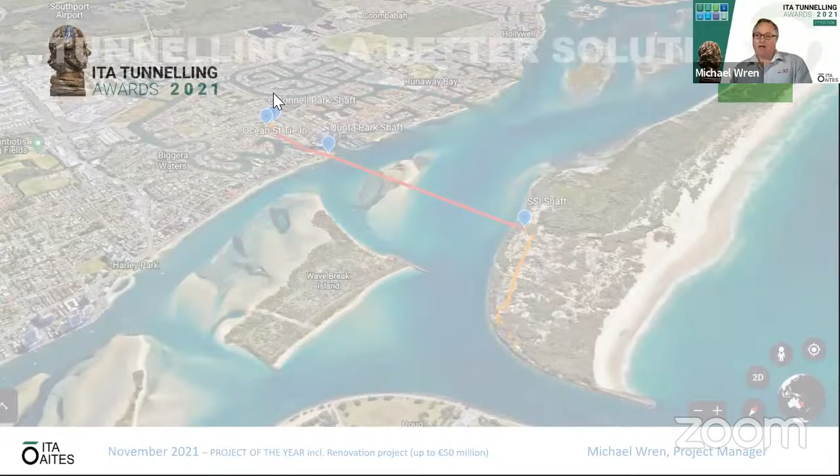Part of this project was to install a pipeline from the Gold Coast across to South Stradbroke Island. That pipe was 1.4 kilometres long, and it needed to transfer treated water at a rate of over 6,000 litres per second.

The initial idea was to have a dredge crossing — to dredge and lay a pair of HDPE pipes. But there were significant social and environmental issues with that. There were layers of coffee rock within the dredge profile.

The dredge plume would have impacted over 3 kilometres of this waterway. There were seasonal nesting grounds for curlews on Carter's Bank, an area of seagrass, and all of South Stradbroke Island was a state marine park. So all of that would have been damaged by the dredging.

There was also a large community of sailors, fishermen, recreational boat users, and tourism attractions here on the Gold Coast, and they would have been impacted as well if we had gone with a dredge solution. So together with our client, the City of Gold Coast, John Holland developed a better solution for this pipe crossing, which was tunnelling under the Broadwater.

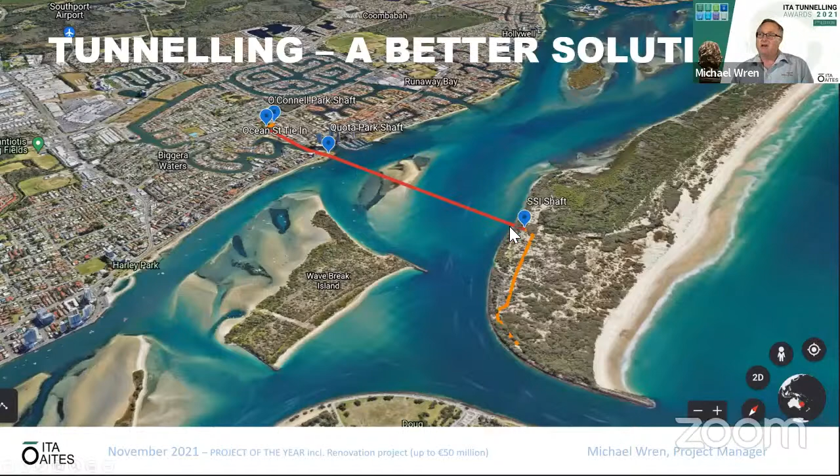We had some exceptionally good consultants, contractors and suppliers on the project. Our key designers and consultants include WSP, Golder, Bonacci, McMillan Jacobs, Independent Civil Solutions and BAMSA. Our key subcontractors were Bothar and Keller, and our key suppliers were Humes and RPC Iplex.

One of the things we did differently on this project was developing a partnering approach. Initially, we ran some partnering workshops before construction started, and that allowed everyone on the team to understand the key drivers for our client, City of Gold Coast, and for the project itself.

During that workshop, we developed a partnering charter that set the expected behaviours. It didn't replace the contract or subcontract agreements, but it did set a basis for how we communicated and how we made decisions throughout the project.

Even when we faced the worst of our challenges, all of the delivery partners were able to work together to successfully complete the works.

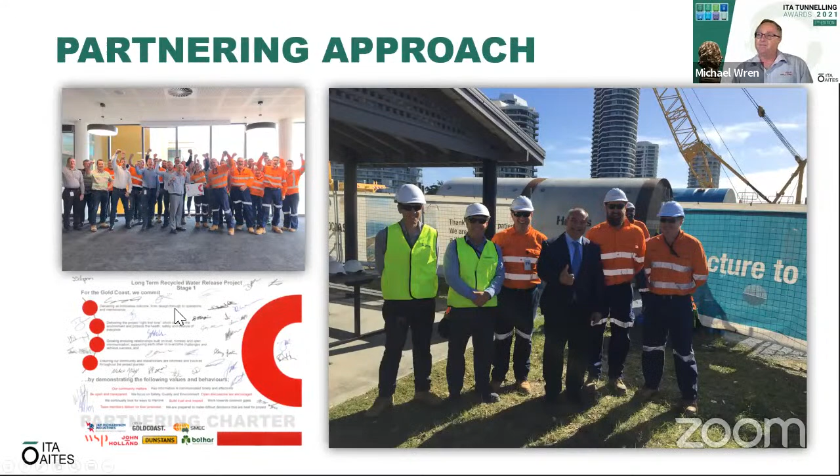This was an extremely complex project. We had 2 shafts over 20 metres deep in saturated sands. The drive was 1.4 kilometres through varying ground conditions, and because it was in the Broadwater, there was no economical place to put an intermediate shaft, so we had to do the full 1.4 kilometres in one shot.

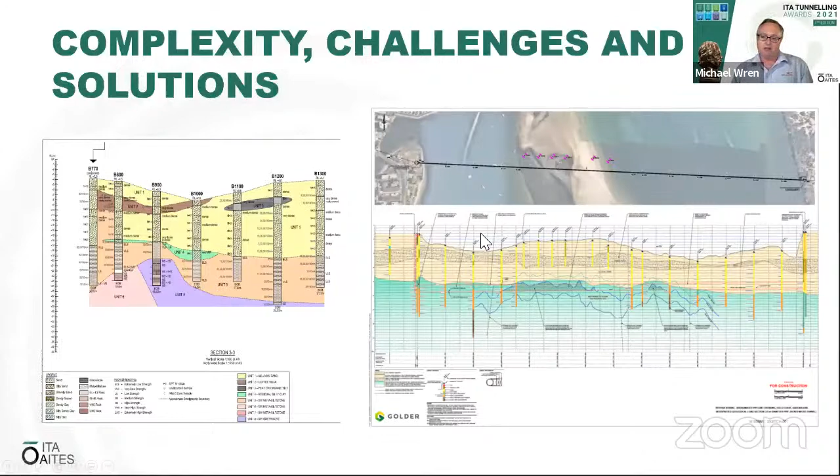We certainly had our challenges, but with our partnering approach and really good subbies and consultants, we overcame all of those challenges. One key challenge was saturated sands — we had 2 shafts to build in saturated sands. Where we did the secant piles for the launch shaft, we had issues with significant water ingress into the shaft, and we resolved that through jet grouting around the shaft and increasing our water treatment.

Over on South Stradbroke Island, we had a different construction technique. We sank a caisson there, but again that hard layer of coffee rock above the soft layers of sand made things quite difficult, and we had some movement and damage to the caisson. Golders put together a really great plan to remediate that — polyurethane injection, more jet grouting, an internal steel sleeve, and some annulus grouting.

The mixed face tunnelling conditions themselves did have quite a bit of an impact, so when we were doing all of our planning, we really focused in on that last section of sand, saturated sand.

Bothar had some really good equipment and really good plans for managing the sand, but the mixed face ground conditions forced the TBM out of allowable survey tolerance. We overcame this because we had a product pipe inside the carrier pipe, and we were able to adjust that to get the tolerances we needed.

The most significant challenge we faced was some significant cracking and crushing to the pipe, and the pipe getting stuck. Across the full duration of this drive, we had 45 days of stoppage for investigations and repairs, including a single stoppage of 25 days. That was a real challenging time for us.

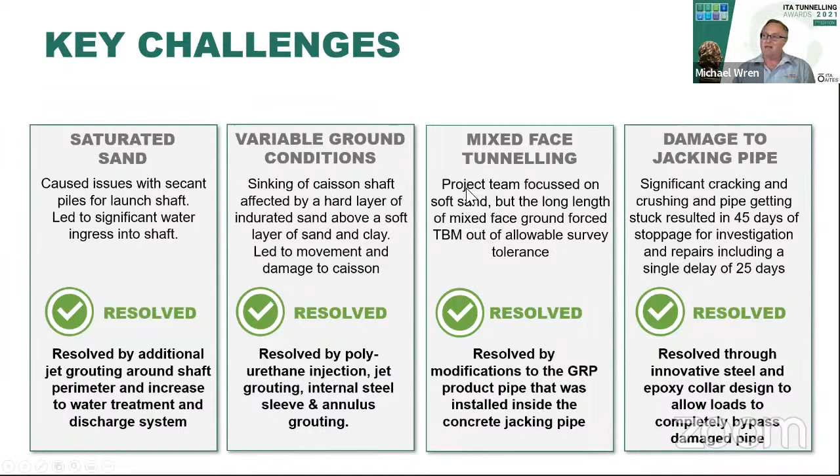Despite the challenges, or maybe because of them, this project was a great success. Our specialist consultants, such as WSP, Golder and Bonacci, provided great service and innovative solutions when we needed them the most. Our key subcontractors, Bothar and Keller, both had excellent equipment, experienced operators, and were able to put in a huge effort to overcome all the challenges and get us across to the other side.

Because of the way John Holland delivered these works, and because of our partnering relationship with City of Gold Coast, we were able to negotiate an additional portion of works. That involved a second pipe jack from the same launch shaft back under Biggera Creek to O'Connell Park. This provided our client, City of Gold Coast, with significant future cost savings by reusing that launch shaft and reusing all of the plant and equipment, staff and workforce that were already mobilized.

This second crossing was a great success. But most importantly, we were able to deliver some great infrastructure for the City of Gold Coast with minimal impacts and many benefits to the community and the environment.

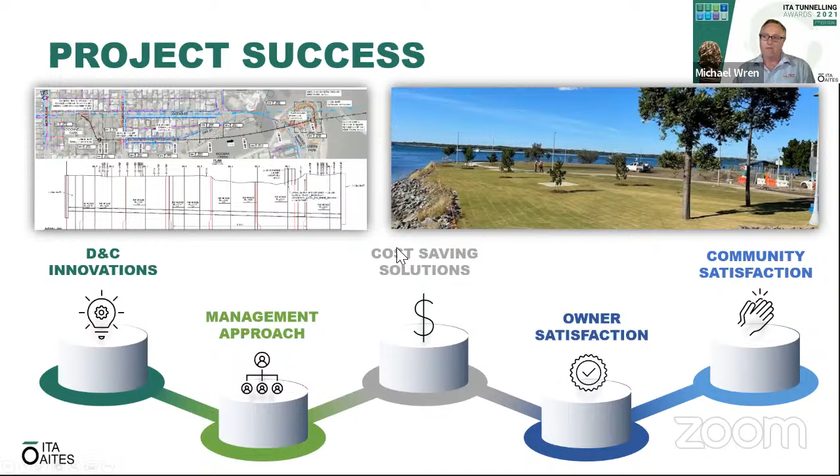Thank you very much.

Yes, okay. Let me start with introducing the project here. As Olivier just introduced, the title is the relocation of Sha Tin sewage works to caverns.

The project client is the Hong Kong Government Drainage Services Department, and AECOM is the consultant. Here, I'm the Chief Resident Engineer. For those who do not know the Hong Kong system, the Chief Resident Engineer is the consultant supervising the whole project itself.

So the agenda today is a project overview, the innovation we adopted in the tunnel works, sustainability, site safety and health - one of the very most important focuses in this project - and finally I will go through the conclusion very briefly.

The project overview: I just introduced the client, consultants, and contractors here, and similar to the previous presenter, we adopted the partnering approach where all three parties worked together to achieve the common goal.

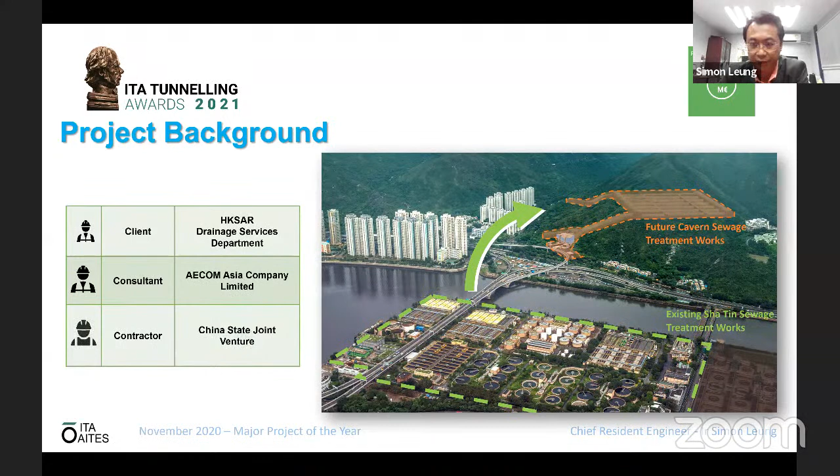What you see in the photos on the right-hand side is the existing sewage treatment plant. The aim of the whole project is to remove every single facility on the left-hand side of the river and relocate every single tank to the other side of the river, not exposed to the public, inside the cavern, into Nui Po Shan in Hong Kong.

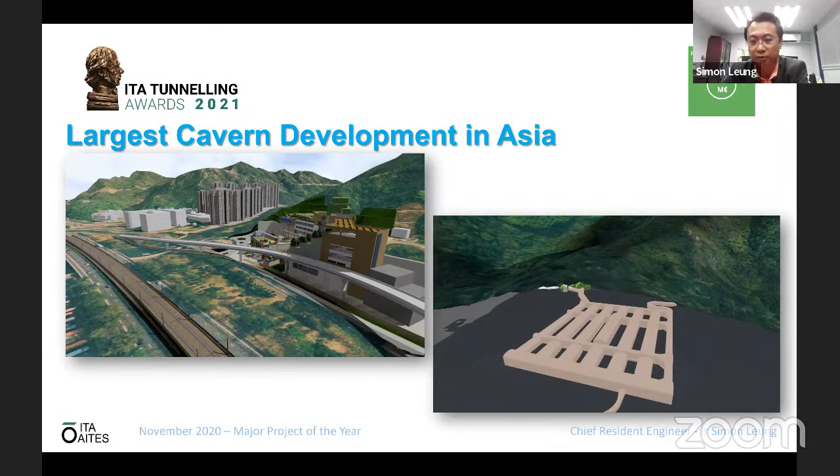Why does Hong Kong need to develop large caverns? Because, as you know, Hong Kong is a very small place. There's a pressing need for the Hong Kong government to find land to develop residential and recreational land use.

So the whole aim is the cavern development territory-wide plan formulated.

So the study on the long-term strategy for cavern development is the territory-wide cavern master plan, to formulate a policy and develop a systematic relocation program.

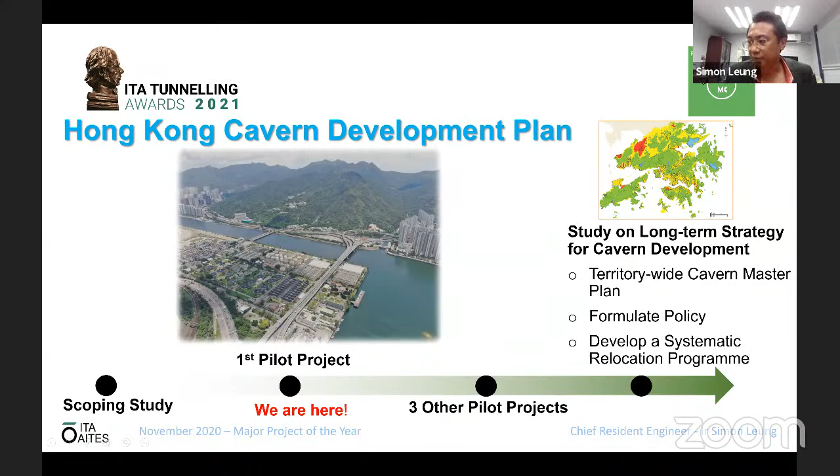So we face a lot of challenges in this project. This is a very large-scale project, lasting more than 10 years, to break up the cavern and build up the upstream drainage and sewage facilities, and also demolish the existing sewage treatment plant. This is a very complex project, because we have to spend a lot of focus connecting with the interface, sorting out the interface with the external project, and also the internal interfacing problem as well.

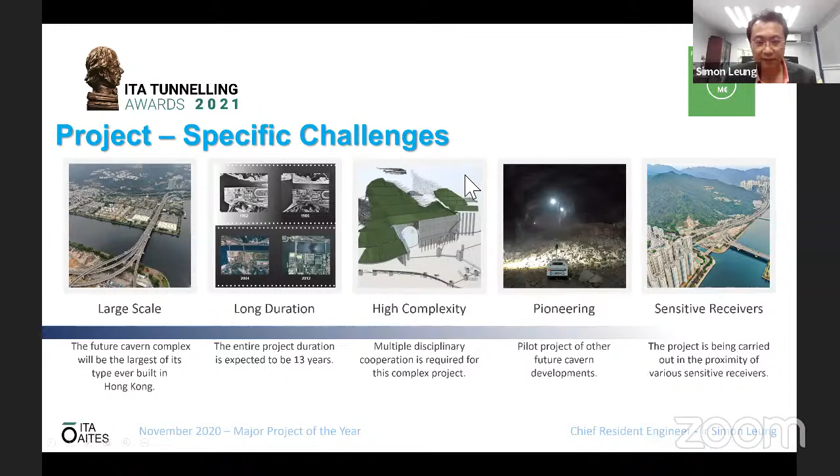It's a pioneering project, because this cavern is very wide and very large in scale, about 20 meters high, about 25 meters wide, and this is the tunnel's first project here. The future tunnel project is about 32 to 35 meters wide. This is a very complex cavern development, involving a lot of multi-blasting, about 7 to 9 blasts per day in the future.

So the conclusion is to uplift the technology adopted in the site supervision for the tunnel, as a pilot project for future cavern development in Hong Kong. That's the very brief introduction of this project.

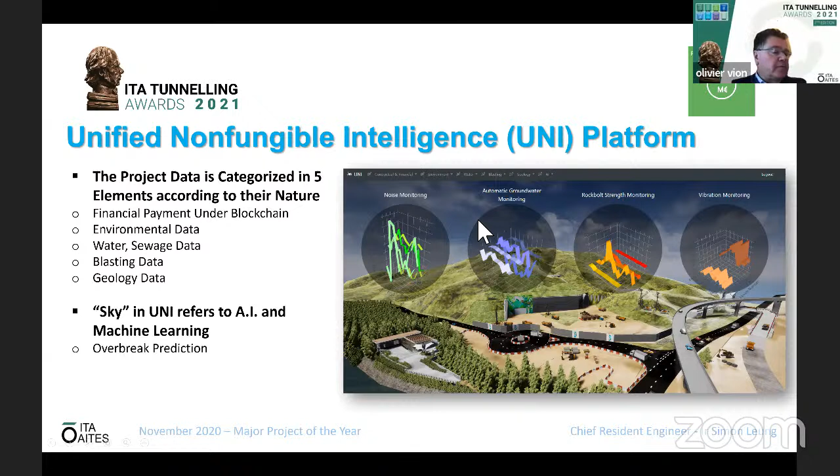Okay, and that's the end. Thank you, Simon. But your last slide, maybe we will come back to it, because it was also something quite interesting in your project - the one on Unified Intelligence. Yeah, that one is something for discussion as well. Do you want me to discuss it now? No, just after. Okay then, can you stop sharing? Thank you.

Hello everyone, I'm very happy to report on the Tangjiawan Dananshan Emergency Shelter Project. First, let's look at the project overview. The Tangjiawan Emergency Shelter Project is positioned as a wartime civil air defense project, which is mainly used as a cave laboratory, the Lyra Project, during peacetime.

The project started in July 2019 and was completed in April 2021, with a total contract amount of RMB 146 million. The construction area of the tunnel is more than 24,000 square meters.

The main body is a Φ-shaped structure composed of one main entrance and one secondary entrance. The total excavation length is 1,550 meters, with many types of tunnel intersections, diverse and changing cross sections, and complex construction techniques.

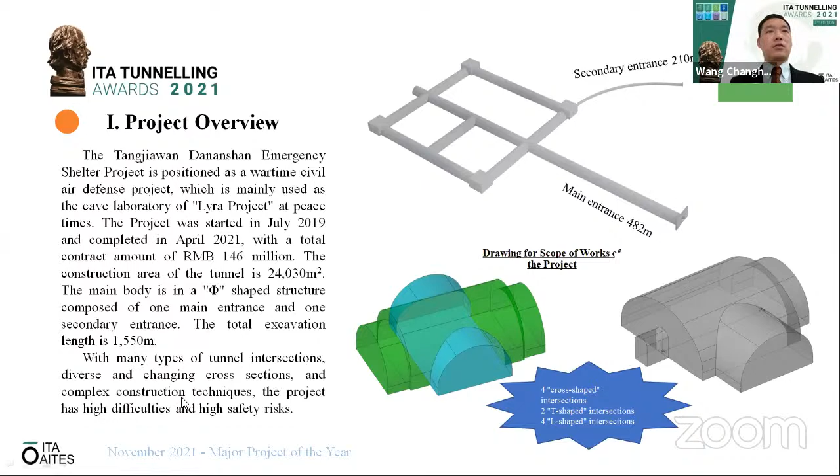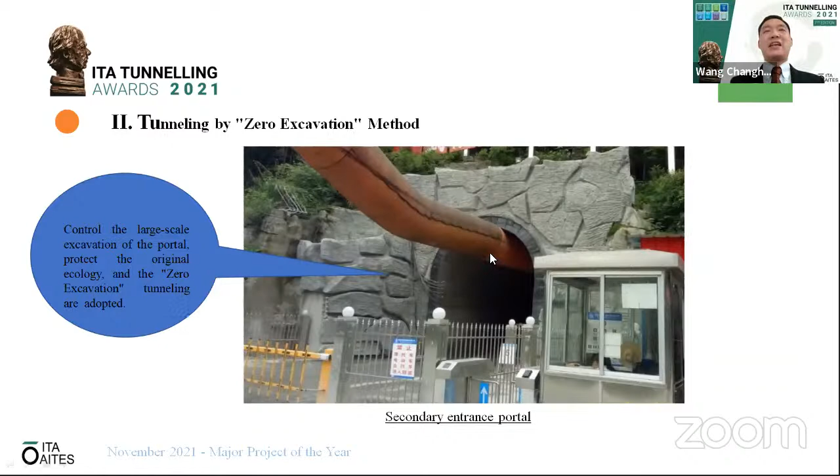To control the large scale excavation, we use the tunneling by zero excavation method. We extend the entrance 8 meters from the original design. The tunnel was used as a wartime defense project, but for peacetime it is used as a cave laboratory for gravitational wave detection.

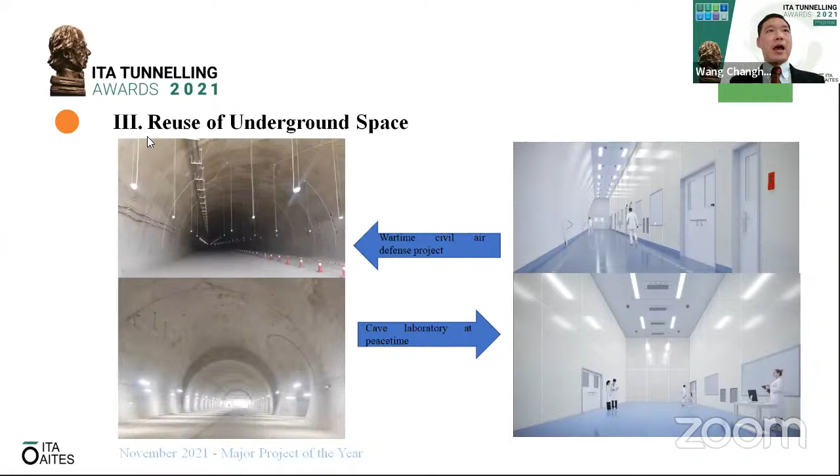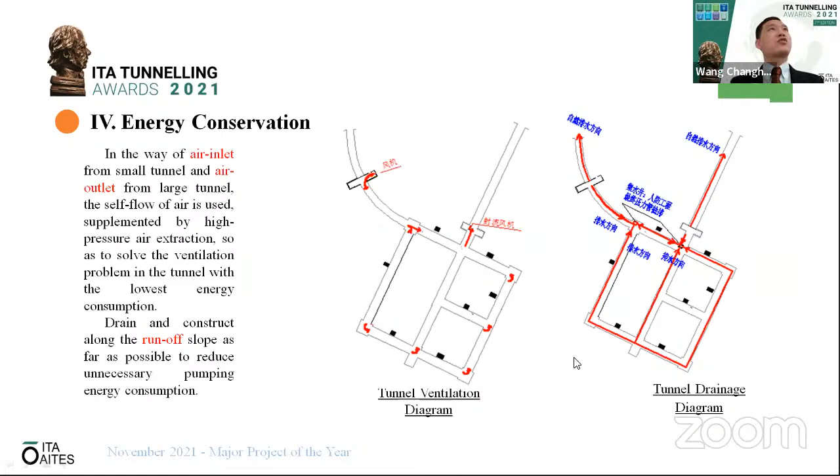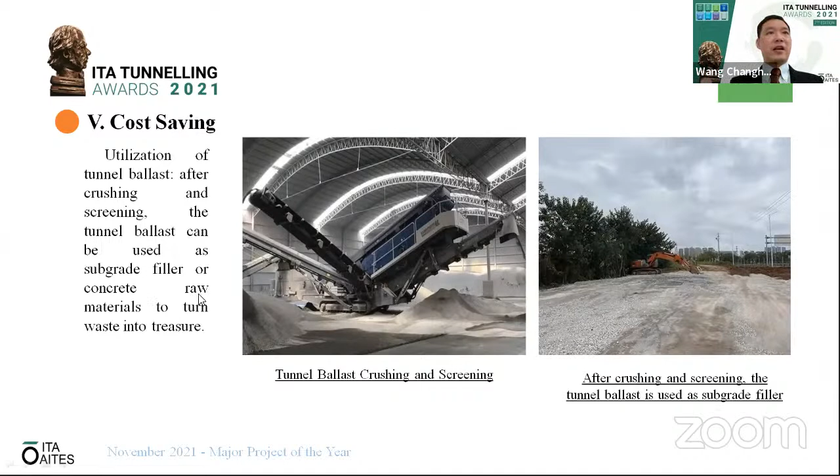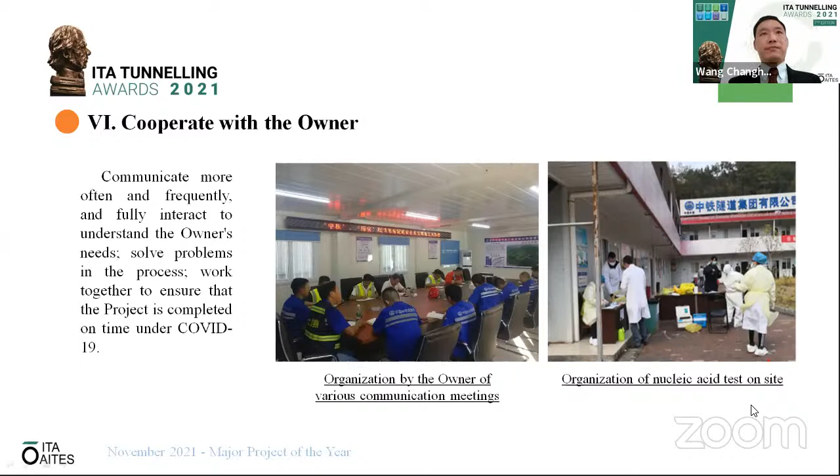Finally, we wanted to make a summary: the innovative approach faces difficulties and creates high quality underground projects with new technology and environmental protection, controlling cost for the environment, coordinating and cooperating with social development. So for that kind of underground utilization, we may achieve green and environmental protection and ensure the sustainability of the underground project. So thanks.

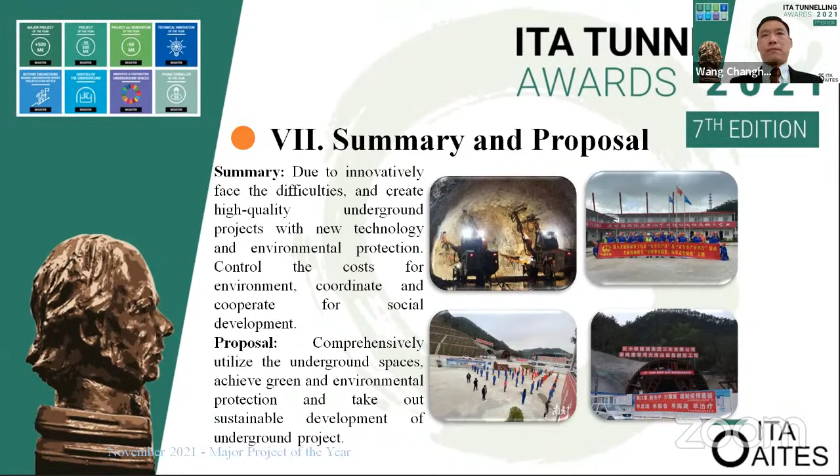That's all for the simple introduction of the Danishan Shelter Emergency Project. Thanks.

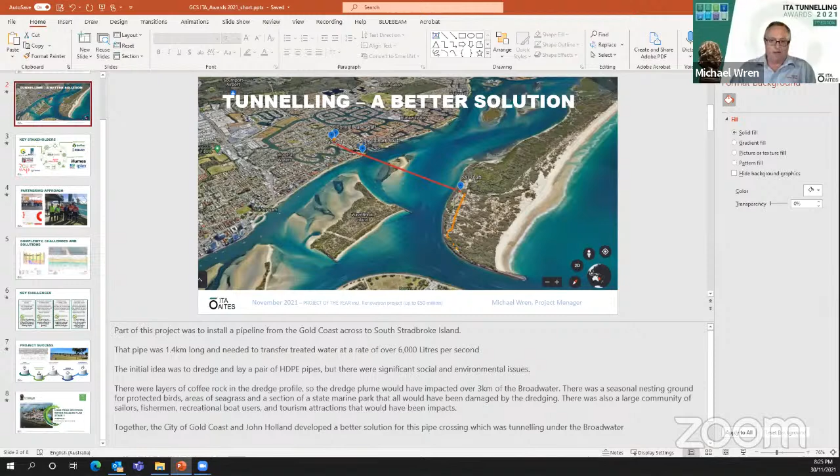What we delivered was stage 1 of the long-term plan. Let me share my screen again... The long-term plan for the City of Gold Coast has quite a few stages. This was stage 1, which effectively removed the bottlenecks. There was an existing pipe across here that had been dredged about 30 years ago. Stage 1 of the long-term plan was just to remove the bottlenecks across the Broadwater, and that increased their capacity by about 40%.

The full long-term plan has about 6 stages all up. It won't be fully developed for another 10 years, but it increases capacity by 350%. So there absolutely are more stages after this one - the next few are just connections into the treatment plants. There will be an ocean outfall at some point, probably the other side of 2030, with multiple diffusers out to sea. One constraint the City of Gold Coast has is they can only discharge on an outgoing tide, to ensure it takes all the recycled water out to sea. Once they get their ocean outfall, they'll be able to pump 24/7. It's quite a smart strategic plan by City of Gold Coast, and they've staged it well.

One of the great things we were able to do was bring forward part of the next stage of works and add it to this stage. That really helped City of Gold Coast get under the creek going back towards the treatment plant - we saved them building an extra launch shaft in probably 5 years' time, and saved the community from having to put up with construction again in another 4 or 5 years. So it was a really good outcome.